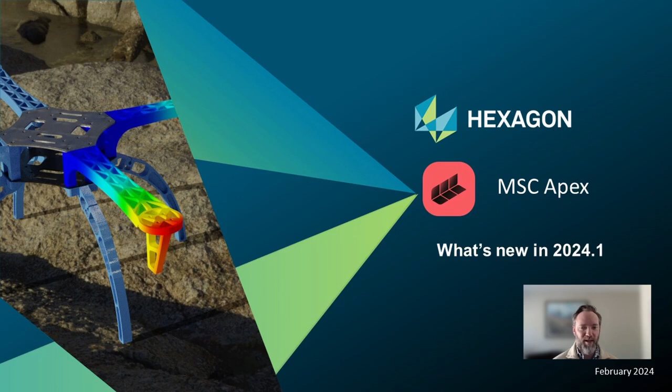We're very excited with the release of MSC Apex 2024.1 as this brings a huge boost of MSC Nastran support, so let's get started.

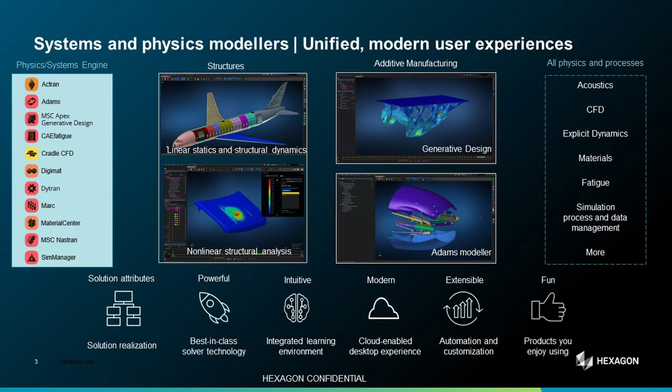Starting with a very wide view, there hasn't been much of an update to the vision for MSC Apex. MSC Software, and now Hexagon, has had a strong collection of solver technologies. We've leveraged MSC Apex to provide next generation user experiences for MSC Nastran, Adams, and generative design. While we've been primarily focused on desktop workflows, we're proud to introduce cloud connected solutions with Nexus, and I'll have more on that in just a bit. The goal with MSC Apex is to provide a modern direct modeler and mesher with full coverage of MSC Nastran for linear, nonlinear, and topology optimization workflows with direct access to cloud compute.

Before we jump into what's new in 2024.1, I wanted to revisit our progress over the last year. First, we had new support of MSC Nastran modules. Modules allow the organization to work independently on separate sections of the model and bring it all together without the need for ID management. We also added support for shrink wrap meshing for acoustics modeling. 2023 was also a good year for scripting development, as we saw quite a few new tools extending what was possible with MSC Apex.

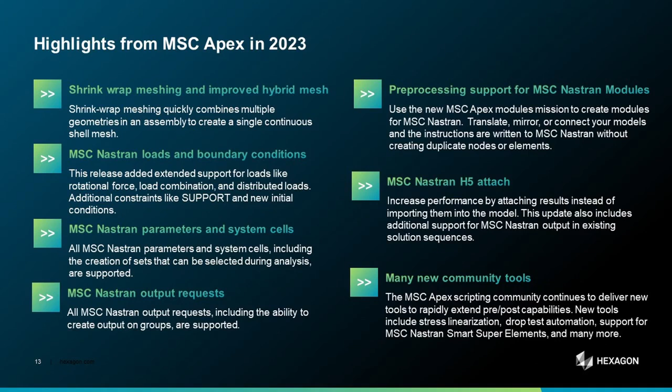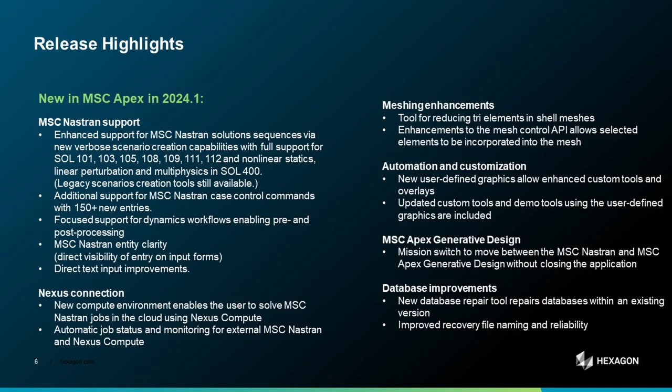This brings us to MSC Apex 2024.1. The main focus of this release was wrapping up the support of MSC Nastran with case control and solution sequences. While that was a big focus, we also added support for Nexus Compute, some important meshing enhancements, a powerful new tool for creating your own Apex customizations, as well as tighter integration with generative design, and some overall robustness and stability enhancements.

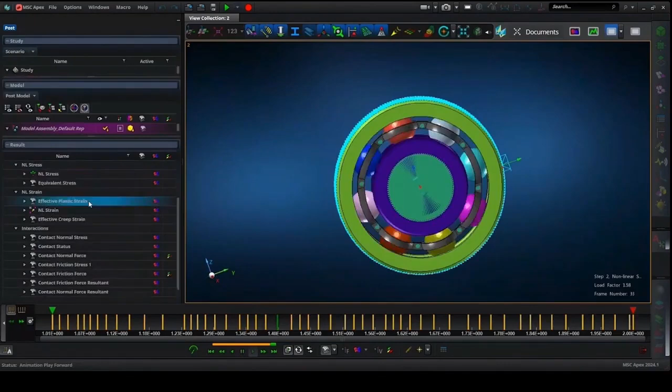Starting with the case control and solution sequences, we took a similar approach to past releases, which is to add support for as much MSC Nastran content as possible. For solution sequences, we added or expanded support for linear statics, normal modes, linear buckling, modal and direct frequency response, modal and direct transient response, and MSC Nastran Sol 400 nonlinear. This includes additional workflows covered by these solution sequences such as random response and shock.

Additionally, while Apex doesn't have all the required bulk data entries for every MSC Nastran solution sequence, the user can toggle options in MSC Apex to write out the necessary solution sequences and case control data. The idea is that with some minor bulk data edits with direct text input, the user can leverage much more than is shown by default.

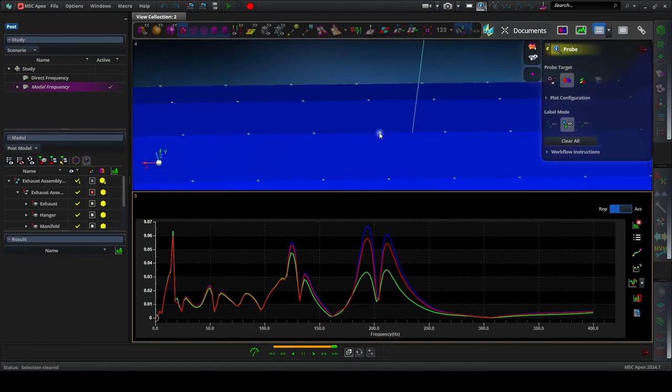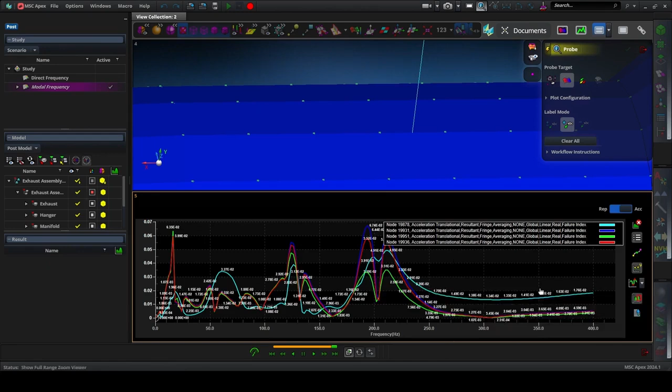As I mentioned before, the primary focus of this project was enabling new Dynamics capabilities. This includes both support for pre- and post-processing. For Dynamics, this means improved capabilities for charting. Users can select any node in the model and chart dynamic quantities like displacements, velocities, and accelerations.

In addition to all the work supported this release to support Dynamics, the new case control enhancements also extend the user's control over setting up nonlinear analysis for MSC Nastran Sol 400. This ranges from basic improvements over load combinations, steps, and substeps to multiphysics with chained thermal structural analysis.

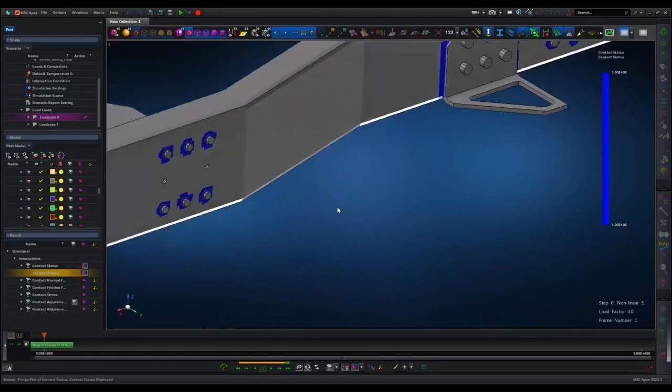MSC Apex can automatically convert older style solution sequences such as 106, 153, 129, 159 to MSC Nastran Sol 400. Additionally, utilities shipped with MSC Apex can make debugging difficult nonlinear analyses much easier. These tools will identify challenges in contact or convergence and allow the user to fix them before running a long nonlinear job. These tools can be used with MSC Nastran or with other third-party FEA solvers.

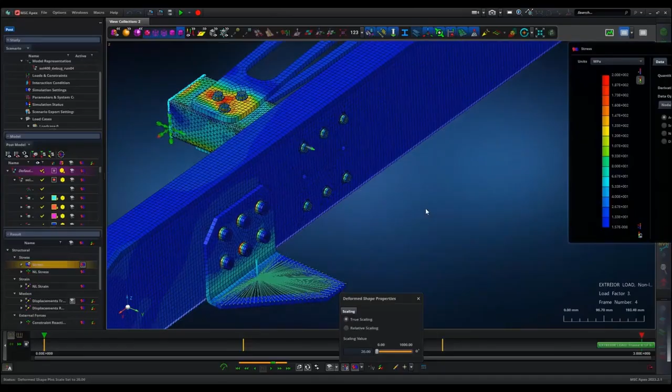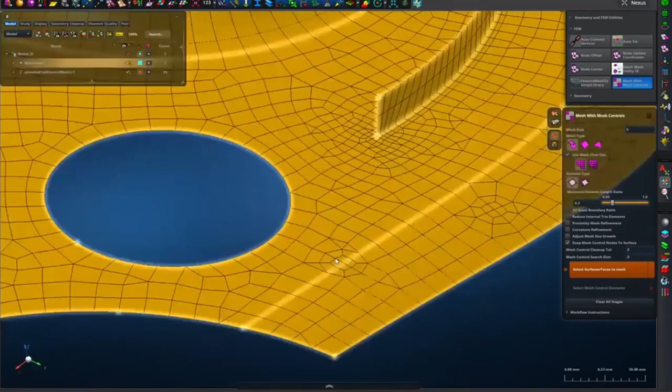MSC Apex continues to build on its strong capabilities for moving from CAD to mesh with two new meshing enhancements. First, a new routine will allow the user to refine the shell mesh to limit the number of generated triangular elements. Second, users can inject pre-existing nodes and elements into a new mesh, allowing for more control over features and connections. This enables many new workflows with MSC Apex, including lock mesh, associating orphan mesh to geometry, fixing mesh patterns in mesh at fasteners and welds, and connecting to an external mesh by matching existing mesh patterns.

This capability is available through the Scripting API, and a demo tool demonstrating this capability is included with this release.

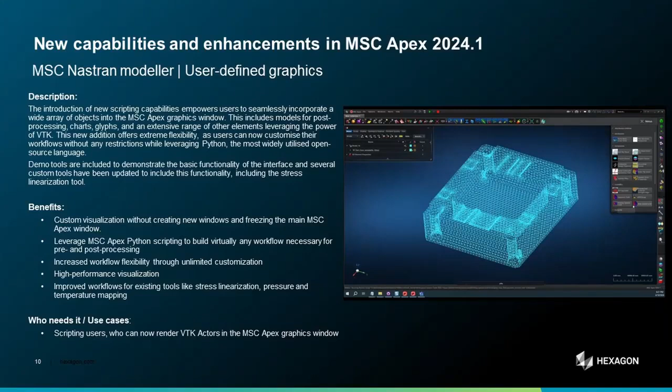Expanding the extensive scripting and API capabilities, MSC Apex 2024.1 adds the ability to add new graphic objects to the MSC Apex window. This includes models for post-processing, charts, glyphs, and much more. Previously, tools like stress linearization, pressure, and temperature mapping would create a new graphics window to display these custom graphic objects, but these can now be drawn into the native Apex graphics window. This allows users to pan and zoom and use all the other common MSC Apex gestures.

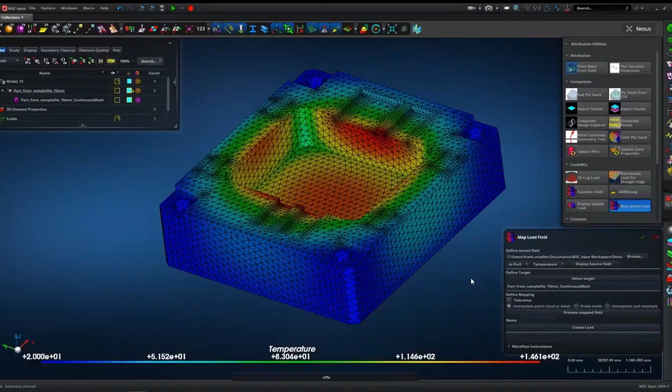When running large models, MSC Nastran benefits from having higher-end machines with ample memory and cores. If you don't have access to one of these or to high-performance computing, we're now offering Nexus Compute. MSC Apex will automatically submit your MSC Nastran files to the cloud for solving.